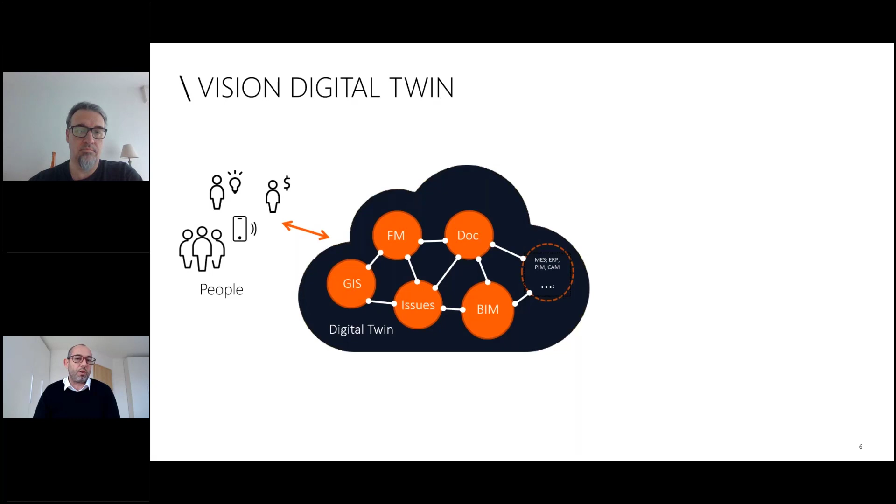You already jumped a bit ahead. So in the end, our vision is that we create a digital twin. This is all of the information we have, put in the cloud: BIM models, issues, geo-information systems, maintenance information, documents, and more. This information is in nodes in the cloud, and it's connectable. These white connection lines are for me the most important part: we don't store information only on our desktop computers, but somewhere we can use it together. This helps people make better informed decisions, act more competently, make fewer errors, and be faster.

But it's not only the people, it's also the buildings that get smart and benefit from centralized data management in the cloud, and more and more autonomous systems, like for maintenance, cleaning, or construction, or even machines that use infrastructure, like trains and cars. Next, please. Good. If we now connect this information, we will get a huge data lake that we can empower even more by using computer science and artificial intelligence.

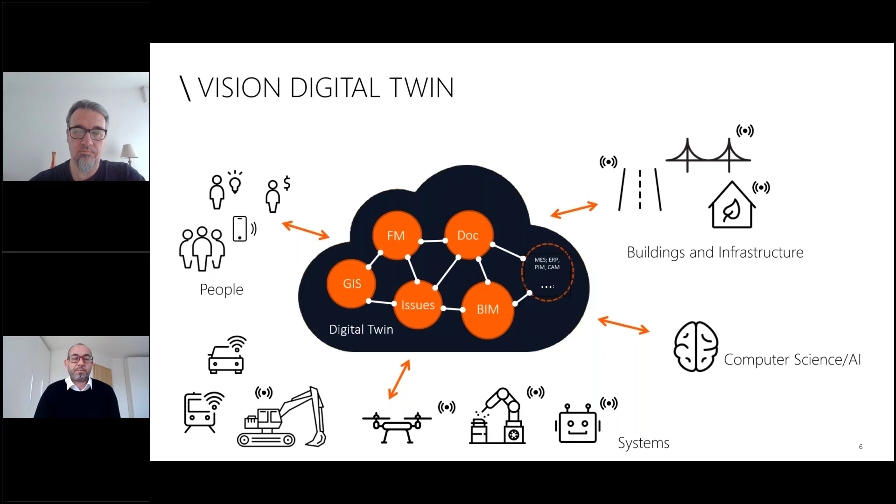So this is a slide about the status quo. Where are we with this digital twin technology? Where are we with building information modeling? You see, it's getting ever more mature.

So today we have well-defined model types for different purposes, like for design, for machine control, or models for simulation that give us an outlook and forecast of performative behavior of, for example, the MEP system. So it gives us a view to the future.

We can define with our building information models the entire built environment. So besides the buildings that you possibly know that is there, this main topic of BIM, we can define as well landscape, transportation infrastructure, and all of the infrastructure for supply and disposal. So altogether, there's at least I don't know any gap left that we cannot describe as a model.

If you look at the building life cycle, we see that in the AEC industry, the usage of this model is not as comprehensive, maybe, as the asset classes we can describe. So there's more and more digital tools in place in early design processes. Of course, in the design phase where BIM maybe comes from, we see less usage at the moment on construction sites. There's different reasons why it's like this, but these construction models are really complex and effort to produce them. But we see models that go to construction sites are already in use.

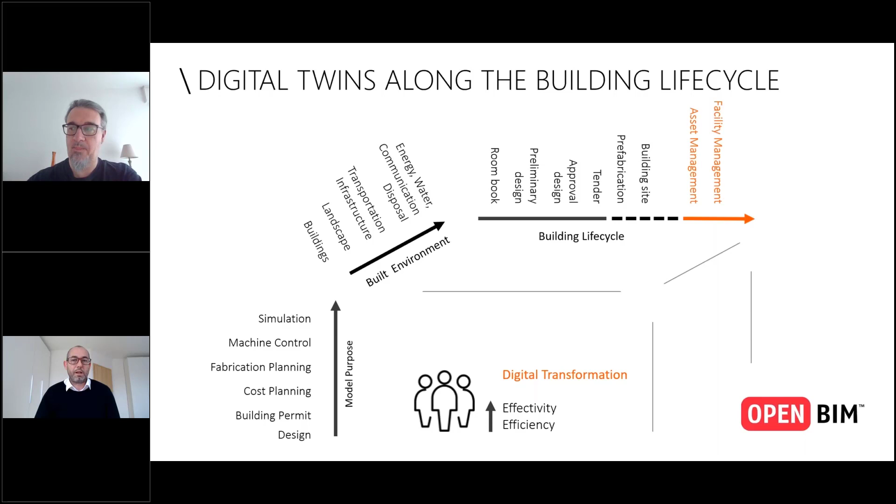So what is the challenge now for BIM to FM handover? To understand this, I think it's important to understand what this model really does. The BIM model, you can see here one on the slide, always consists of geometry. So this is what I meant with showing the spatial context, so we can easily understand this geometry.

But a more important part is the information part we can connect to this. So the geometry is not only geometry; it has a meaning, a semantic. For example, here it's a heating system, part of a heating system, or it's a pipe, and you can manage the properties of this pipe from design to construction to handover now on this geometric model.

So this is the information part, and I would say almost as important is the option to link information to it. So not all of the information about a certain element is stored in the model itself. We have the opportunity to link information on external cloud services, or we can link documents or specifications to this. And of course, all of this information should not get lost if we hand it over to facility management.

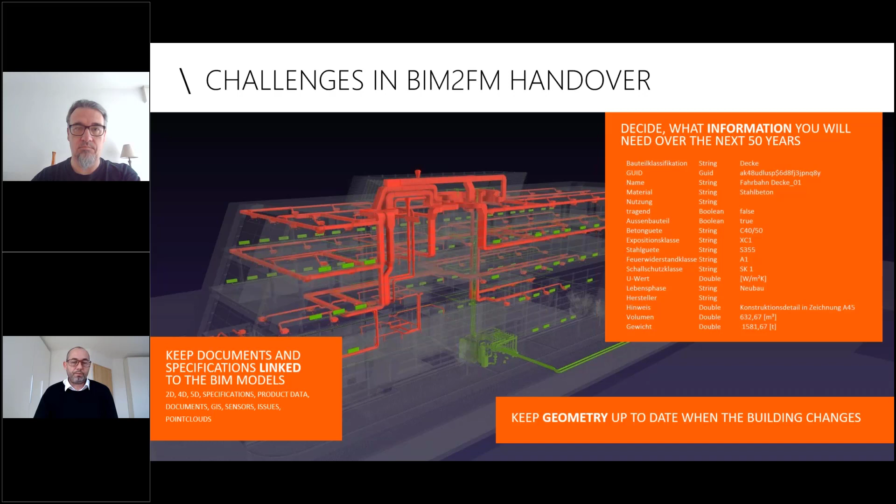We created on the ALLPLAN side a solution called BIM+. The most important idea behind it is that we don't store this digital model as a file. We take that file and create a real database from this.

This database includes all of the information of the model and can be maintained by us at ALLPLAN, or by any other tool out there that is openBIM ready. Our Spacewell solution, MCS, is also connected to the same database and maintains the same model over time. So we don't really split the design and maintenance models.

We make the facility management system maintain the BIM model. This way we achieve a data-secure and data-enriching process over the whole life cycle of the building.

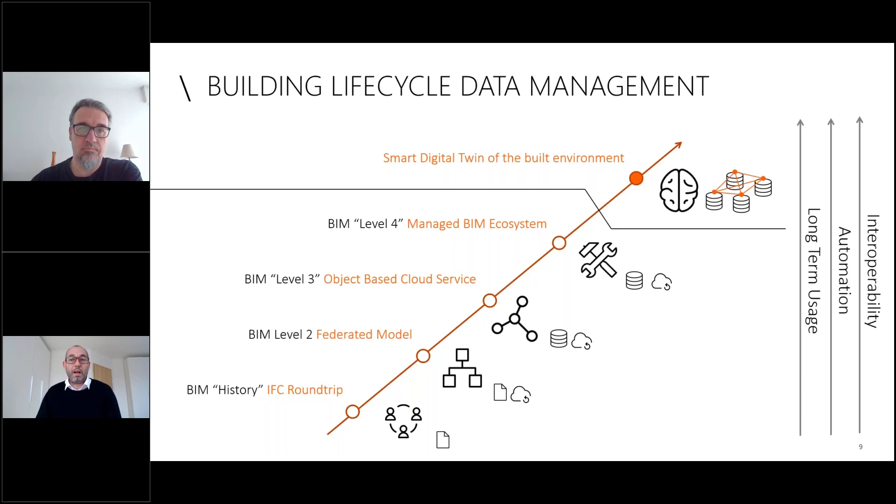So this was a lot of information already. If you have any more questions about BIM, you can always contact me, and we would love to give a deeper dive into our solutions. But today I would like to hand over the microphone to Kurt, who will show you in practice how this integration looks like.

Thank you, Stefan, and thanks everybody for spending some time here with me this afternoon. In the next half hour, I will guide you through how we have done an integration between our MCS IWMS software and ALLPLAN's BIM+ environment.

But before I jump into that, I'll give an overview of what Spacewell's activities are, what we're doing, how we fit in the Nemetschek group, and then also a few things on the MCS software suite. I'll try to keep this chapter as short and concise as possible.

Just to give you an idea, we've been around for quite some time. We are headquartered in Belgium, but we have branch offices in various places in the world, as you can see here. The software has been around for quite some time, and we have more than 2 million users worldwide. It's also a cloud offering that we have.

Spacewell is actually active in the operate and manage division within the Nemetschek group. You could say that we come last in the BIM process, because first there's the planning and design phase, where typically Graphisoft, Vectorworks, but also ALLPLAN is active, creating and sharing these BIM models, then carrying them over to building and construction. Today we're going to talk about how, once we have those BIM models available after construction, we can actually utilize them during building operations.

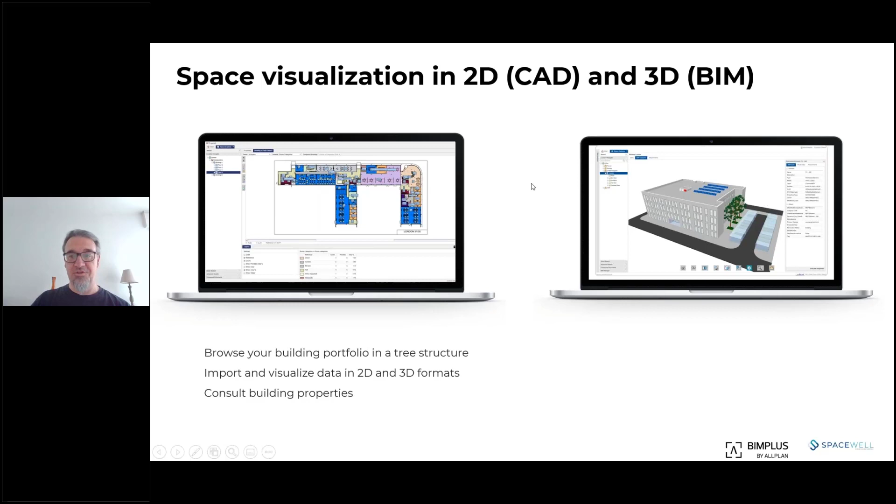Today we are going to talk about the model integration in the application. But as I mentioned, we also have a 2D solution in place, and one does not exclude the other. So for the same building, we can make these combinations.

Basically, you create objects in MCS, and in this case here we can see what we call maintenance objects. That's just equipment. And on these equipments, we can then define maintenance plans that require regular inspections or maintenance on certain weeks of a calendar. And these then, for example, lead to work orders that can be dispatched to technicians.

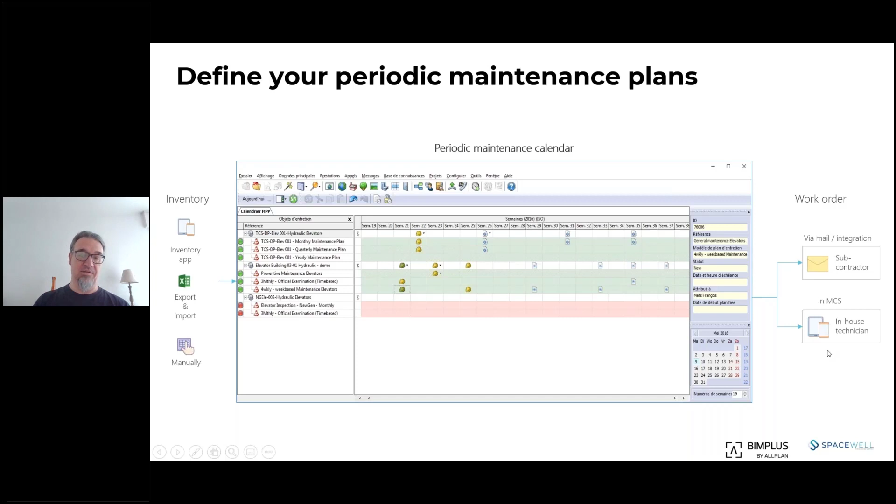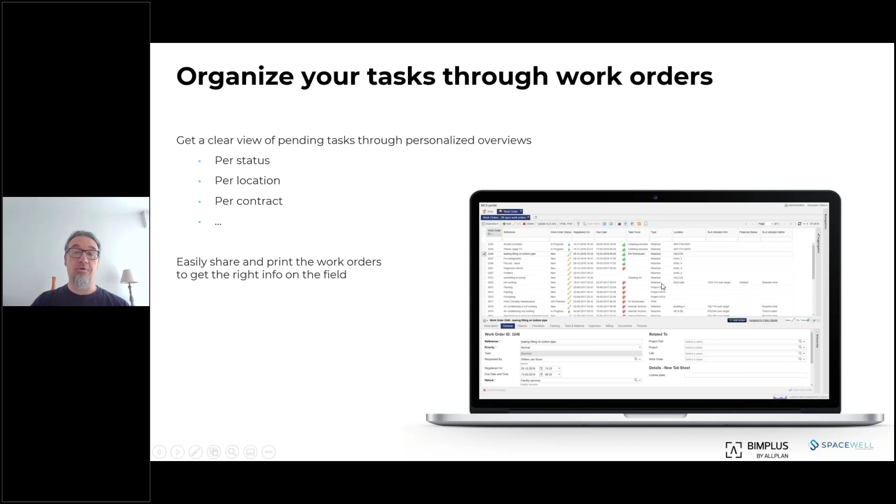And people have various user interfaces to interact with these work orders. So first of all, we have a full web-based portal solution where you see all the work orders that can be allocated to you and then do some handling here. Most people in the field are using our mobile work manager application where they can see details of the work order, where they have to go, sign off, and all that.

So it's in this process of creating and handling work that we're going to see what benefit a BIM model can bring to these people.

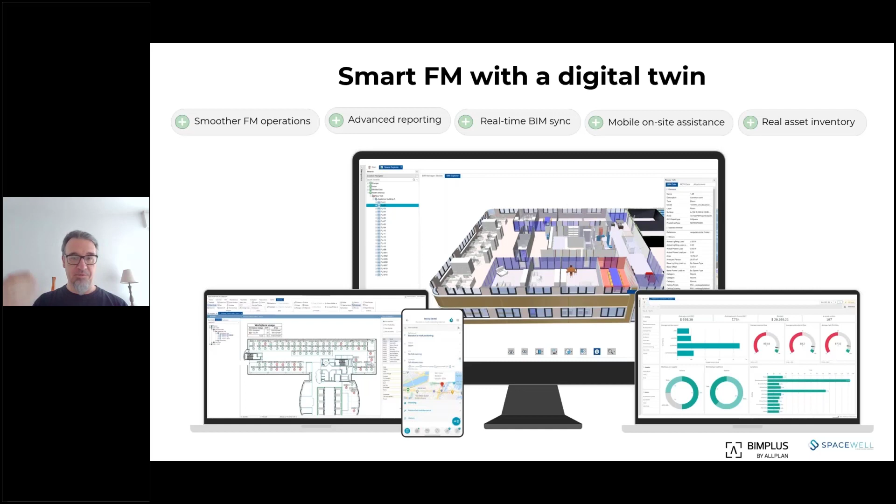So now let's jump into the real topic for today, which is the integration between BIM+ and MCS. So basically, the story is, as a building owner, facilities manager, how can you actually use those BIM models that are available for your portfolio for the processes of building maintenance, cleaning, space management, moves and changes, etc.

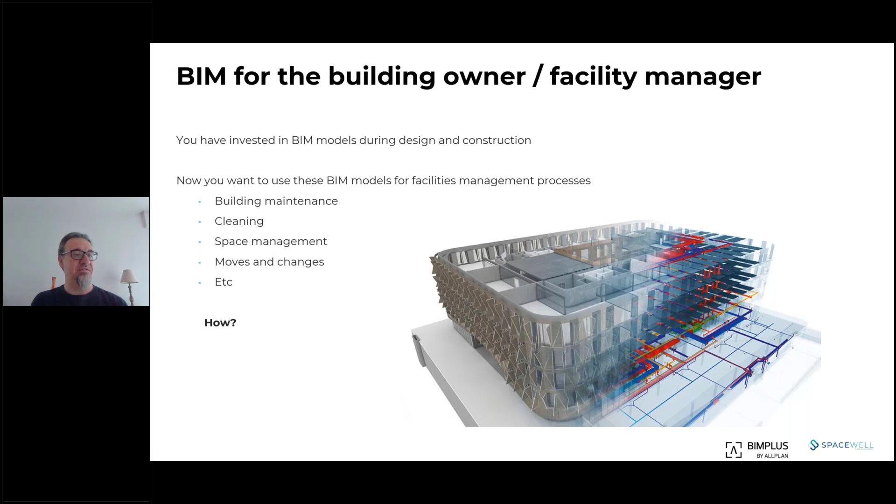So how do you do that, and what is best practice? Today we're going to focus on building maintenance process. For that purpose, the model that we present is as follows: for us, the asset information model plays a central role as part of the master data.

So asset information model is actually the model that contains, let's call it, the as-built of your assets, your current as-is situation. And nowadays, very often that information is saved as BIM models, as part of documentation. So they play a very central role in our solution.

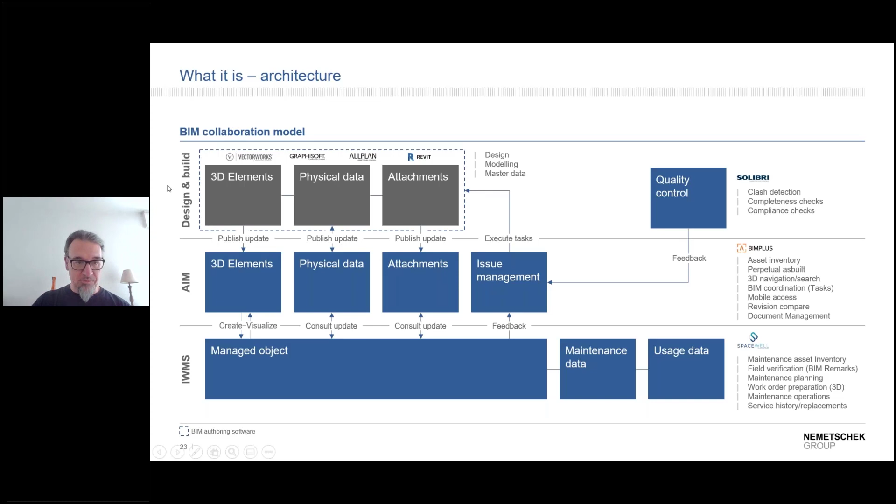I think if you want to remember one slide of this presentation, this is probably the main thing. So what this architecture actually means, I hope to make that clear during the presentation. It means that the solution of BIMPlus and MCS together is a cloud-based platform that you can access through your web browser, and it works with various IFC formats. It can take BIM information from various authoring tools.

What can we do with that? We can import BIM models, we can export them again, we can update again. This important part is revision control, because a BIM model, even during operations, is not static. Buildings undergo change constantly. Not always big renovations, but there are always changes in one or two rooms or a corner or a wing somewhere. And we have to keep our facilities management database in sync with that.

It obviously supports multiple models, but that is more the benefit of BIMPlus, and we utilize that. What can we do with it? Well, we can view and explore the BIM models from the MCS software. We can consult and search all the property sets, so we don't have to make a choice. Which properties do we want to import in the MCS software? And the answer is simple. We do not duplicate information. We just make all the information available. So there's only one place where the property sets are stored. We can compare revisions, and it's of course integrated with software.

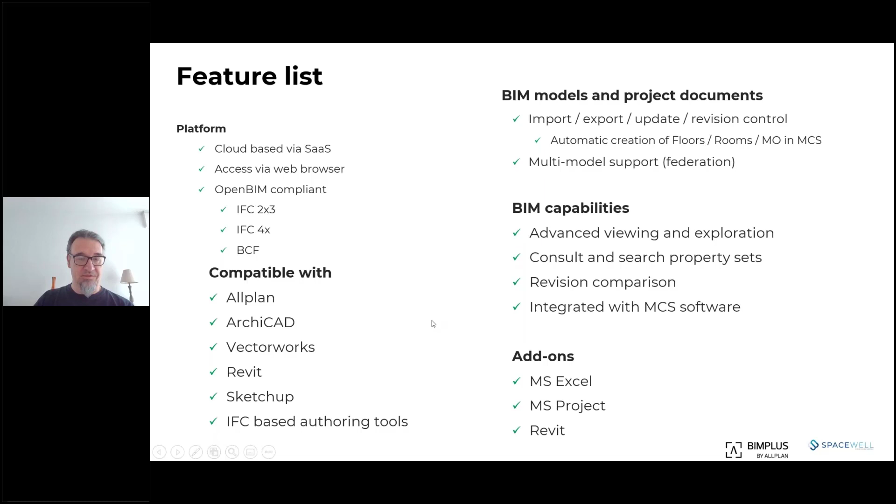Okay, enough theory. I think that you're all eager to see how that works. And just to give you an idea, I have a couple of demos here. Maybe before we do, just quickly jump to BIMPlus for those who may not have seen it. So BIMPlus is the ALLPLAN product, and in BIMPlus, you can create so-called projects. A project is typically a building or a site for which you want to maintain and share BIM models.

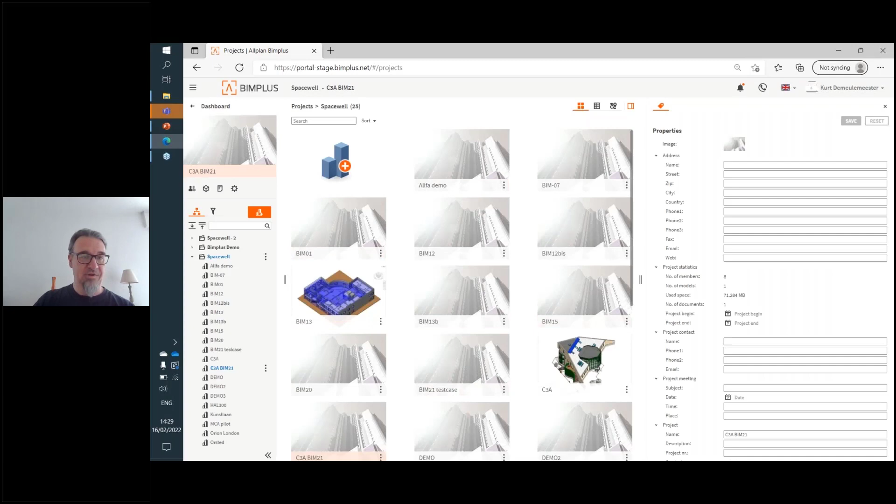So in this environment here, I can have a lot of projects. The project that we are looking at here right now has one BIM model and an attached document. It's a simple demo, but let's just quickly take a look, because this is the model that we're going to use throughout the rest of the presentation. So this is the user interface of BIMPlus. I have my model here broken down in a couple of disciplines, and there's also a topology here of different floors that I can visualize.

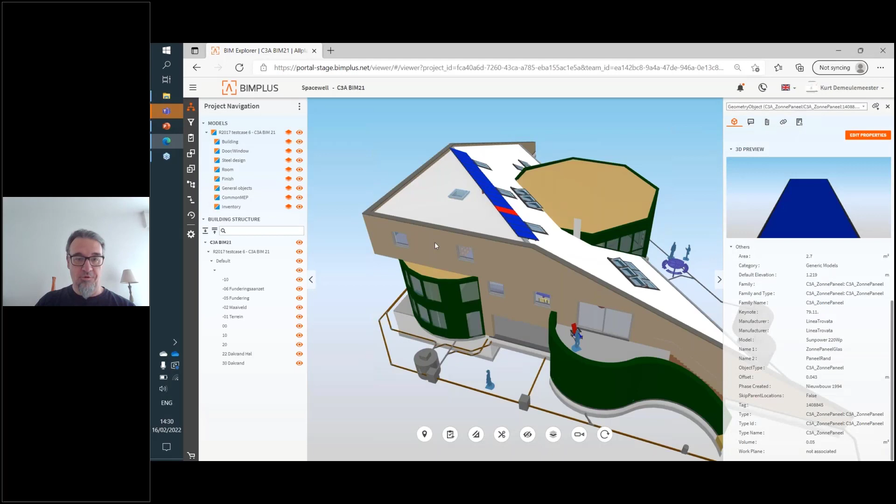So I can easily navigate through that. I can click on items like these solar panels, for example, and then I can consult the property set of these solar panels, or of this wall, or this window here in the roof, as you can see. So it's a convenient user interface to do all sorts of exploration, querying, searching, verification, measuring distances and angles, etc.

A full demo of BIM+ is not a topic for today. So for those people who would not be familiar with that, please get in touch with ALLPLAN, or there are plenty of videos on BIM+ available also on YouTube.

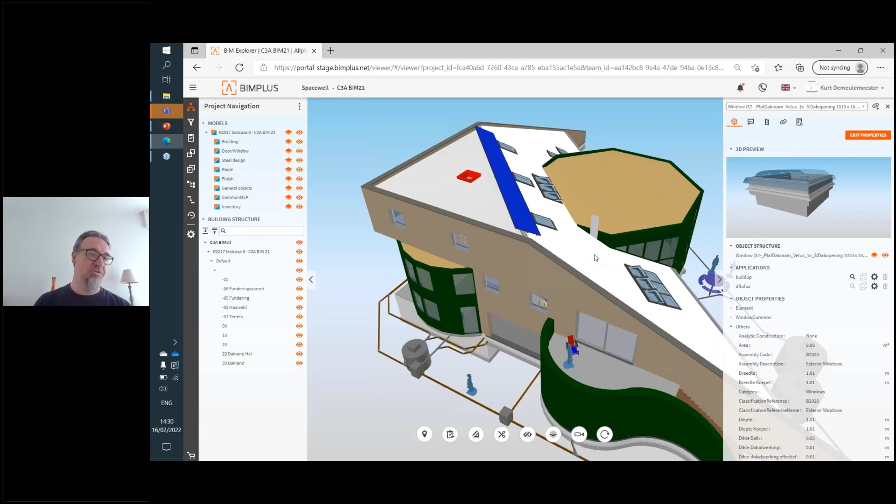But this model here is now going to be used in MCS. So the prerequisite is of course that you have BIM models and that you publish them as a project on the BIM+ server. So now let's take a look at how we can utilize that in MCS.

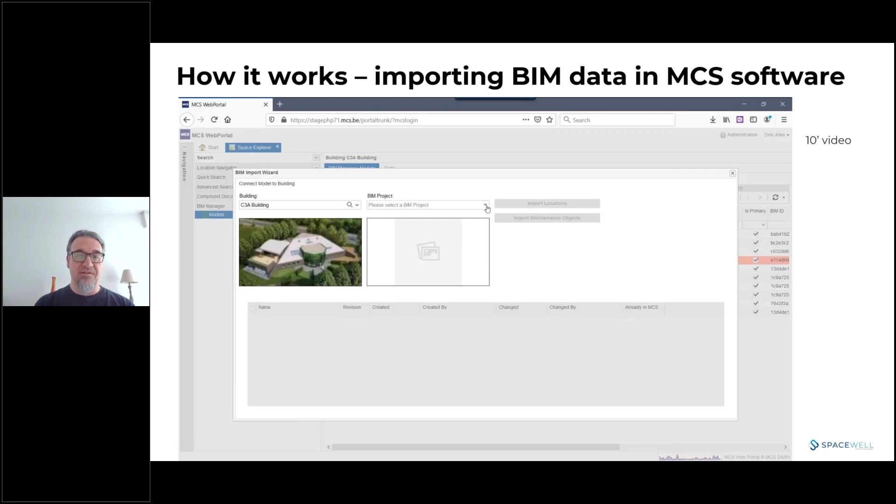Here I have a list of all the BIM models already in my database, and we're now going to add one. So I select the building that I want to have. And then in BIM project, this is a list from BIM+, all the projects to which I have access, and you can see there is one BIM model in this project which is not in MCS yet. The first step is we're going to import locations.

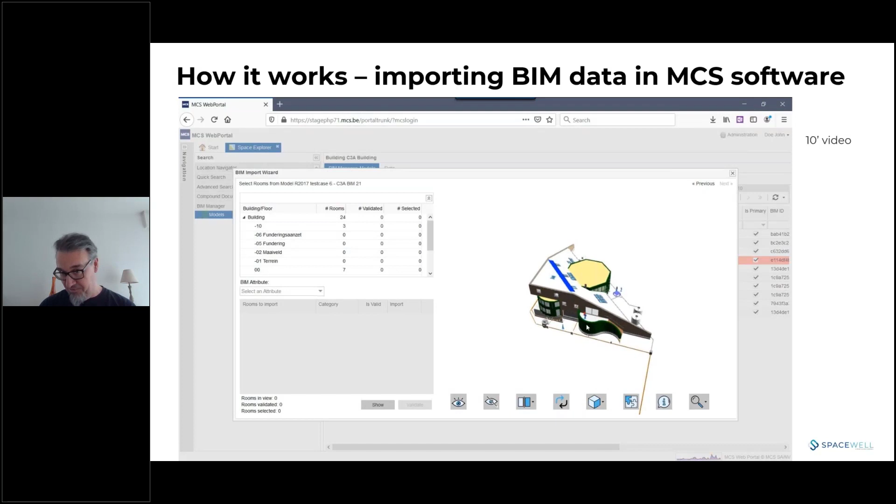So this BIM import wizard gives me a view of what is in BIM+, and we have integrated this viewer for BIM+ as well. And I can consult all the property sets without leaving the MCS user interface. And this is exactly the same procedure as what I just demonstrated through the BIM+ user interface, but it's completely integrated in MCS.

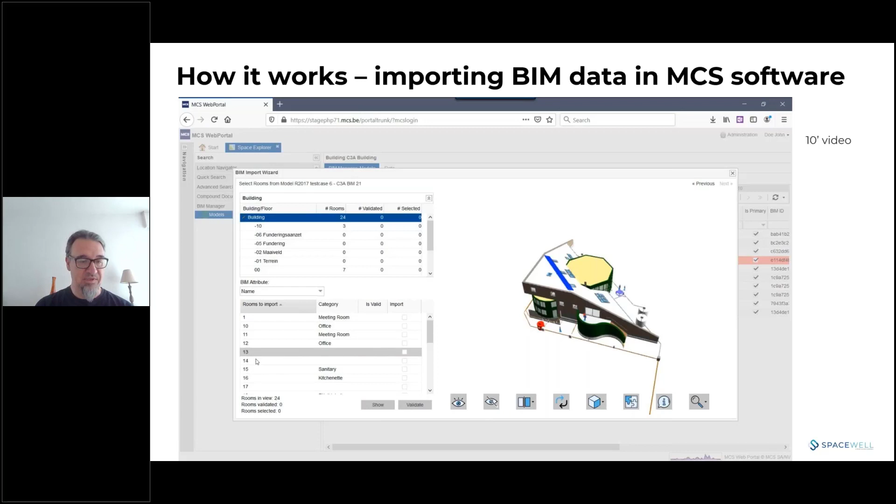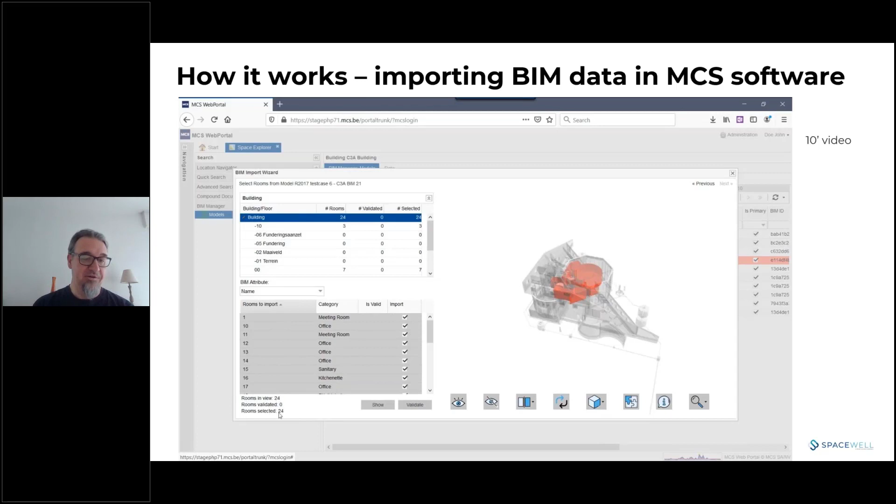So here we now see that on the building level, we have 24 rooms that we want to import. And the BIM attribute name maps to the categories of rooms in MCS. We need to tell what category of room something is before we can import. But the designer forgets to fill in that property for some of the rooms. So I can do this now here as a preparation step, saying all these are offices. So the better the designer has done that mapping homework, the less work I have, but I can still do the mapping here at runtime.

And now we validate if all these rooms are okay for import. So if I have green checkboxes, everything is fine. See, I have now prepared a list of rooms and, of course, the floors to which they belong. And what is now happening is this list that I've prepared is now being imported in MCS. So as you can see here, for each item that I've selected in the BIM model, it has created a new room and a new floor in my facilities database with a unique ID.

And we also store the unique link to BIM+ for each of these elements, so that later I can also see what all the property sets in the BIM model are of that room. We'll come to that in a minute. So that's a way of showing how we actually do import.

And for maintenance objects, so that's for the equipment and the building elements, we can do the same. So here, again, it's the same procedure. You select a BIM attribute that contains the categories in MCS. And we then fetch what is in BIM+ currently. So that's a lot of information in various disciplines.

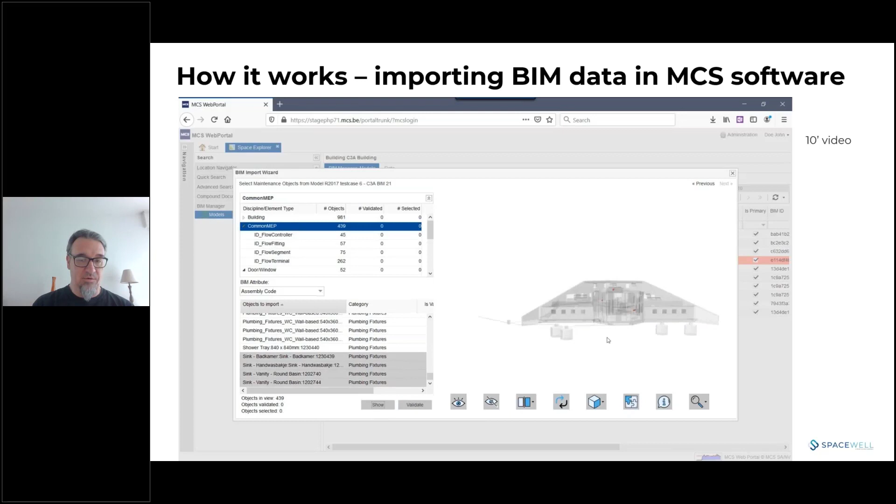For this purpose, we're not going to import any walls or rooms. We're just going to do some of the MEP equipment where the designer has mapped a lot of things to sanitary and rainwater, as you can see. Some other things have not been mapped yet. Of course, if you want to import almost 1,000 objects or sometimes 10,000 objects, this is a bit time consuming. So here, for the sake of the demo, we'll only do a part. So you see, everything here that you want to import can also be visualized, just to make sure that you know what you are importing.

Let's go up. And if we sort on category, then we can multi-select everything that has been mapped, like this, and validate. So we will mark that we want to import it, and we validate if that's possible. Now, these two at the top, you cannot import because they are on a floor that is not in the database yet. So here for the demo, I will skip it, and I can do that afterwards. You can import in various chunks multiple times if you want.

Doors and windows were also mapped, so we're also going to use those because we require maintenance on them. Now, again, there is one door, it's a window in the roof, but that roof has not been created in MCS yet. So there's a dependency. And let's take a look. Finishes, we're not going to do that.

Inventory, we'll just do a subset of all the furniture that is there. So here I have some Breuer chairs. These were not mapped, so I can do the mapping to the appropriate category here. These are tables, right? Let's go down. There's more chairs there. We'll just do a few chairs and a few desks, and that'll be it. But you understand the procedure. So the better the mapping has been done beforehand, the less mapping I have to do here at runtime, but I can still do that.

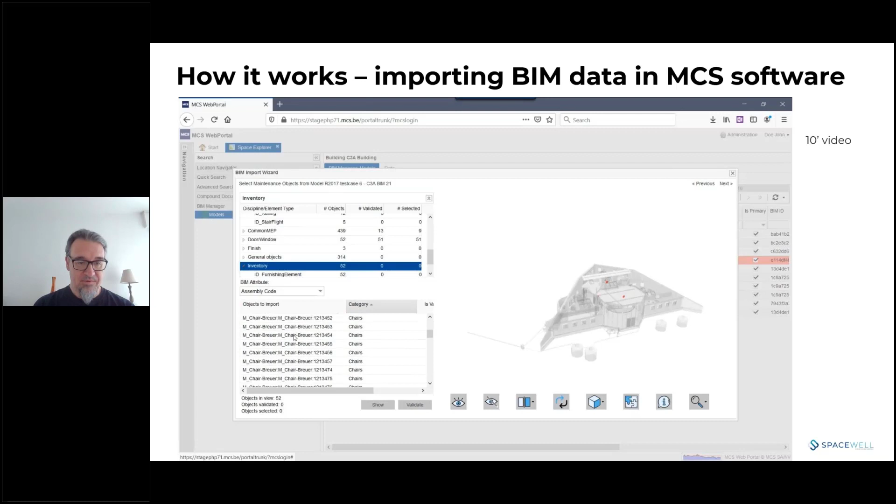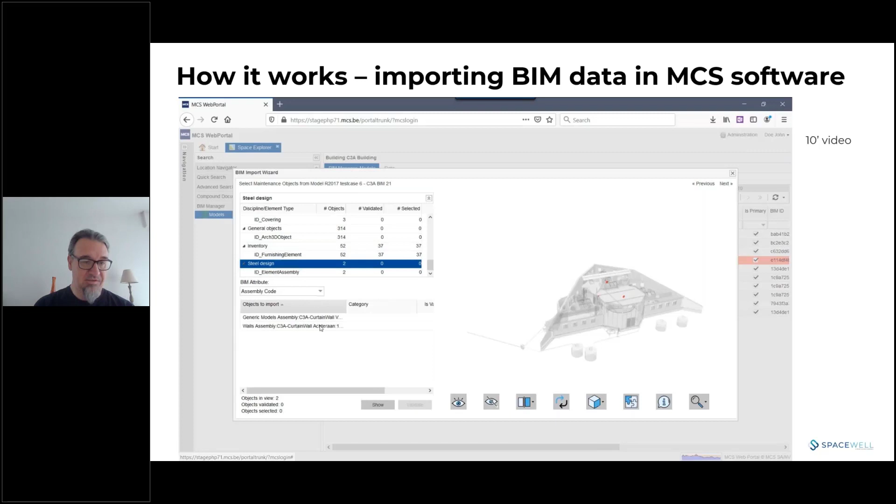And this is also a table, and some more chairs. Okay, so what we have selected so far. Let's do that. We mark for import and we validate. Okay, it's all green. And you can see in the bottom now how many objects I have validated. Steel design, we're not going to do that. So let's press next. Everything that I've prepared is now in this list, verified and validated. So I can now start importing this list. 97 objects at the moment.

This is just a sequential process that takes a few minutes. Meanwhile, let me explain what is happening. We are creating those objects in the MCS database with a minimum set of information. It's just the identification and the category, the name and the type. But all the property sets of these doors and windows stay in BIM+. We don't have to duplicate all that information, because we will make that information accessible from the MCS user interface. And I will show you in a minute how that works.

So you see, I can do this for rooms and floors and for all the equipment. I'm now doing this with one model for the demo, but in reality, for larger buildings, you have multiple models for one building: the architectural model, an electrical model, an HVAC model, a structural model, etc. This is all supported. We support multiple models for the same file that hold various aspects of the building. The requirement is that you upload all these models to the project in BIM+, and then through the same BIM import wizard, you can populate the MCS database with all that BIM information.

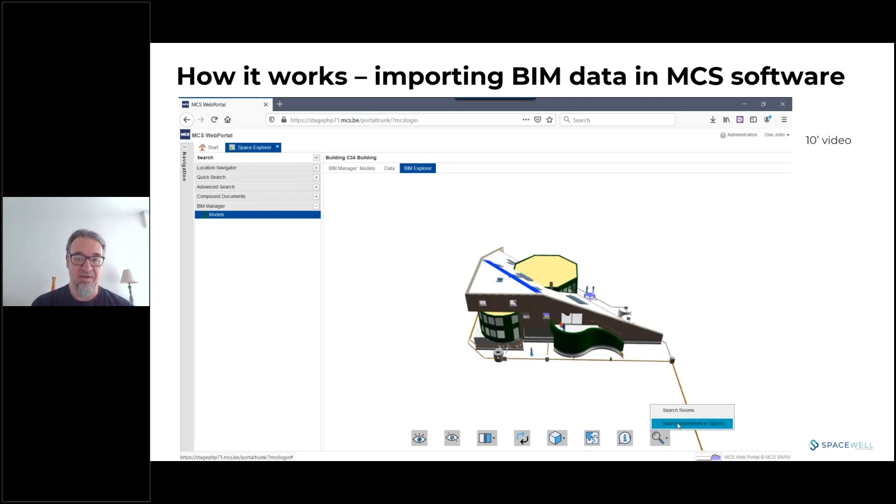Okay, and I can continue in loops here doing this multiple times. Once I've done it, there is another BIM model row in my database, with when it was imported and by whom. And now I can show it without leaving the MCS software in BIM Explorer. This opens all the geometry, which is in BIMPlus. This is not in MCS, but we are using MCS as our user interface. And here we can now search for some of the maintenance objects that we have just imported.

So if we take, okay, I can select here one or multiple. So all these chairs, highlight, where are they? So they're shown there in red. So that's just an example of the result. After an import, you actually get this. You get a BIM Explorer window on your building that gives you access to all the BIM data that are in BIMPlus and that are connected to this building.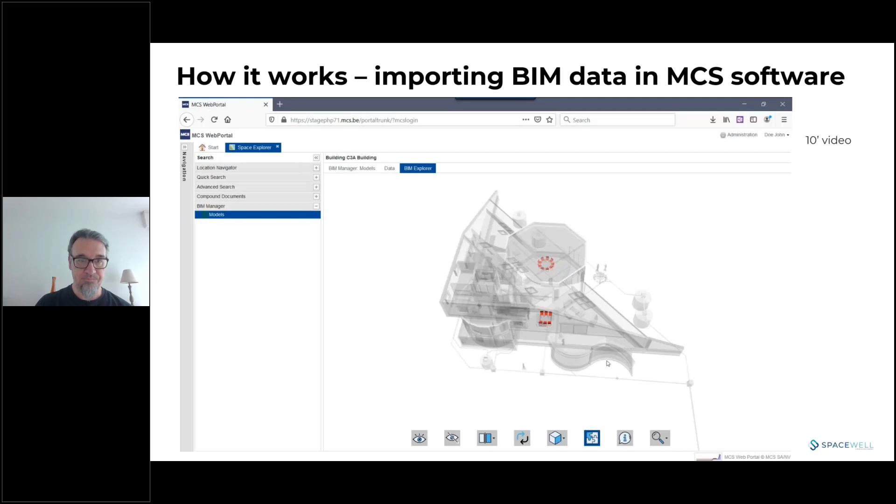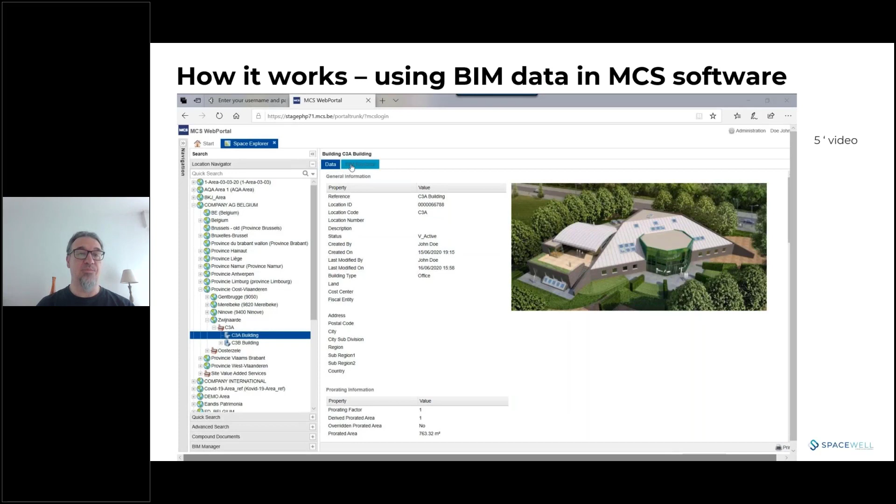Now, how can you then use that? Because importing, yeah, that is something that a specialist is doing from time to time. But more important is, how do you use it in daily life? And there are a lot of people who are using it like this. So again, it's the same building, and we're launching the BIM Explorer. So let's have a look at what we can do with it.

BIM model opens, and just by using my mouse, I can of course navigate. I can control the camera to look at the building from the front, the top, the side, or a perspective view. That is very obvious, and that's nothing complicated. And you just rotate and you zoom by scrolling with your wheel mouse. You really don't need training for that.

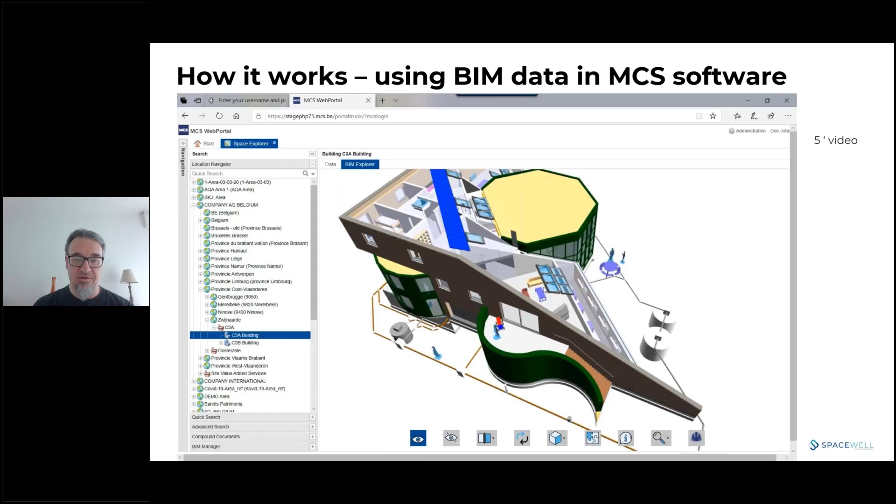There's an option to hide. So if I hide the slabs here of the roof, then I get access to the interior of the building. And let's stop the hide mode. We can even slice the model. Let's have a look like this. So this is a room.

Click. And I have a BIM data tab. And this is at runtime fetching the property sets that are stored in BIMPlus, and we display that here. But it's also an MCS room, which is linked. So that's a room that I have just imported. So you see we have a tab with MCS data and with BIM data.

So this solar panel here has not been imported as an object. So these neither. So I only have a BIM data tab, but I can still access all the property sets of everything through my MCS user interface. And that's the beauty of this integration, even for objects that are not in MCS.

So here I'm now slicing that building horizontally with a horizontal plane, which makes it then easy, for example, to just look at the ground floor. And there we have the furniture, and we have imported that furniture, remember? So I again have MCS data. Yeah, and the same here for various things. Yeah, let's close that.

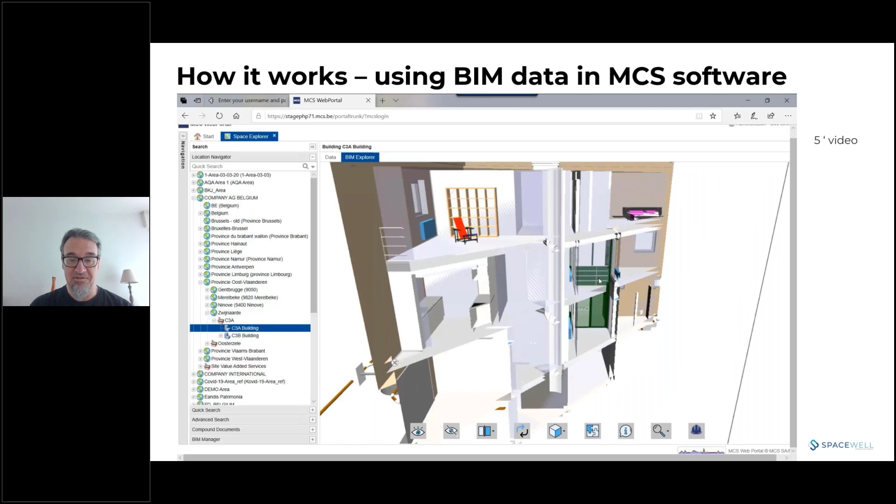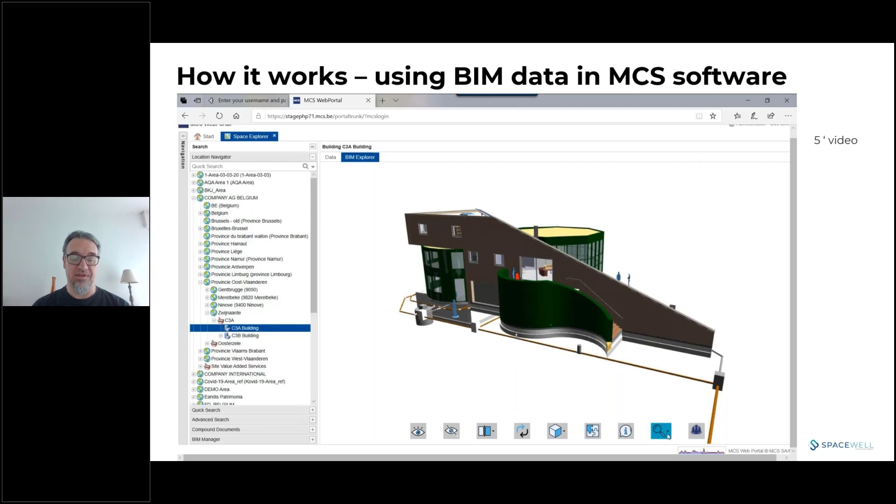And we can even slice our building also through a vertical plane, whatever, and then that makes it easy to look at the inside on multiple floors. Yeah, stuff like that. That's navigation and exploration. So you can navigate, you can hide objects, you can click, you can slice. And now I'm showing what you already saw briefly, that we can search in this BIM model.

And I get a list of all the equipment here. Again, select one or multiple, or like this, all these chairs, where are they? And they're appearing here. And now we can do something particular. Imagine, let's just unselect everything, that there is an issue somewhere with a bathroom sink. So I can just search for sink, and that gives me all the sinks in the model. So this bathroom sink here, highlight, where is it?

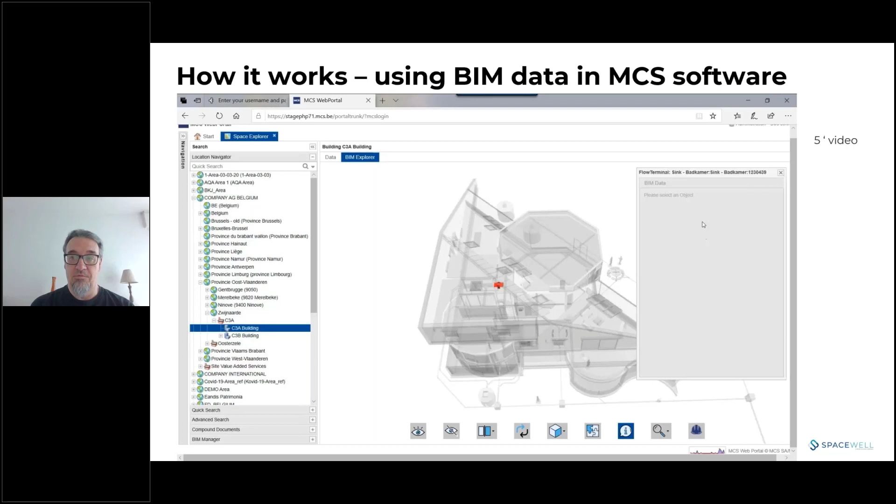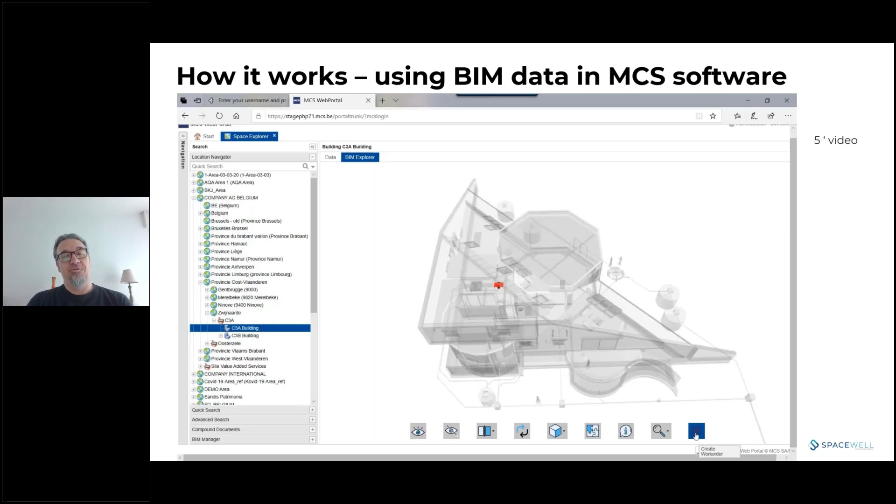Yeah, there. So it's an MCS object, and it has a BIM dataset that is in BIMPlus. I can now create a work order for this item. So in MCS, you can create work order templates. These are just sheets to fill in. So I'm picking one here.

This is just an example, technical issue, and now I have to fill in this request, and some of the fields have already been pre-populated for me because I'm using a certain template. So priority has already been specified, but I can specify severity, for example, and I don't have to tell where it is and what object it is because I have selected that in the BIM model. So the only thing that I have to tell the system is what is the problem.

Okay, and then I'm saving my work order. So that's just the use case of, yeah, you can search items in a building, you can select them, and you can create a work order for it, with a number.

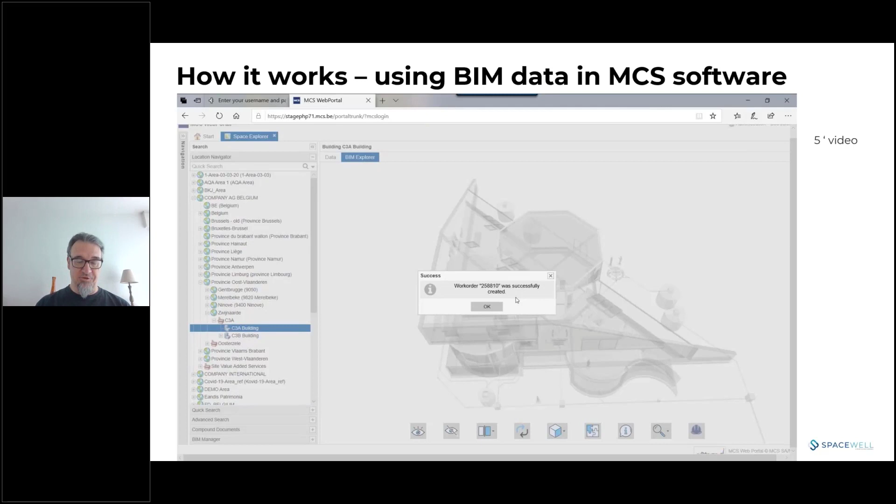Okay, now that is of course the story of the person who reports something. But now let's take a look at how the service technician is seeing that. Now these service technicians are not going through the Space Explorer. They know that they have to work on all the work orders that have been assigned to them.

So they will navigate to the work order module, and they will see lists of work orders that have been published for them. So this is now work orders this month, everything, and obviously the one that I've just created is on top of the list here, depends on the sorting. And here I have a description of that work order. Problem is that the sink is clogged.

Yeah, but where is that sink? Imagine that the technician is not familiar with the building. Okay, it's in that location. And I have objects here. Is that kitchen sink? Yeah. And then I have two buttons here, details and BIM Explorer.

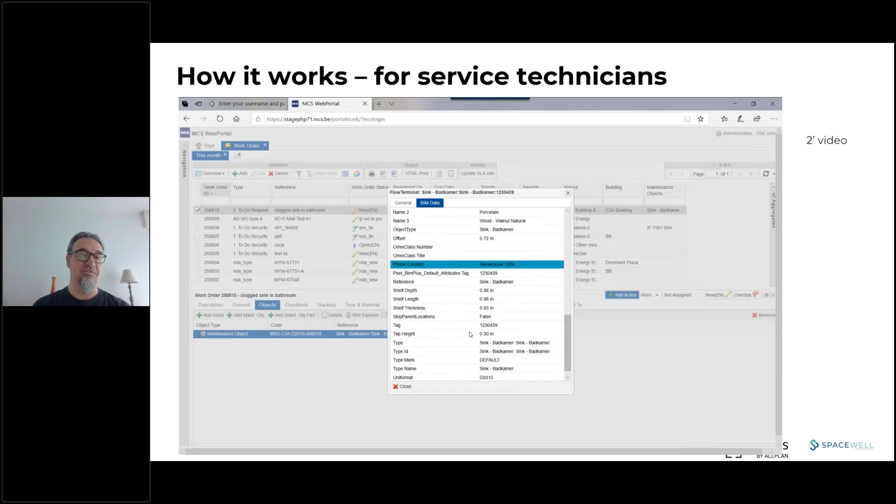If I click details, I see details of that kitchen sink, which is an MCS object, but also BIM data, click, and this fetches the BIMPlus data. Again, even without opening the graphical user interface, I have access to all the property sets in my BIM model, which can be very handy for that person. If there's a spare part number or something, I can look it up here.

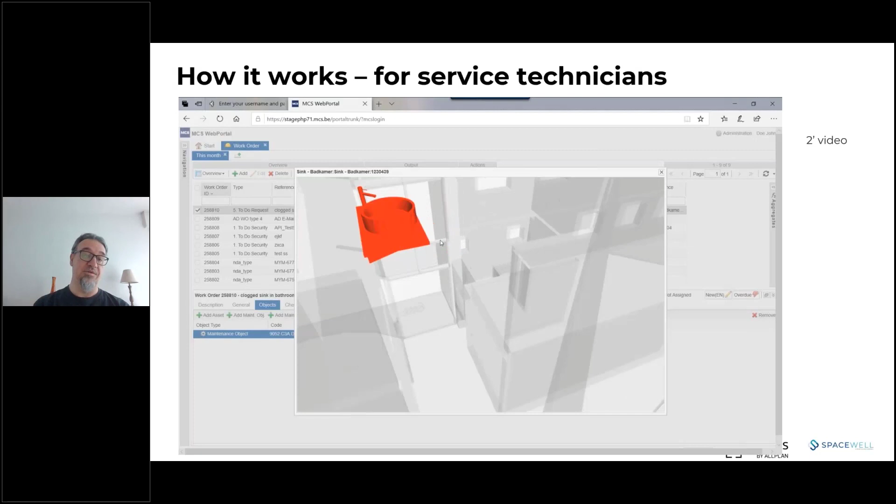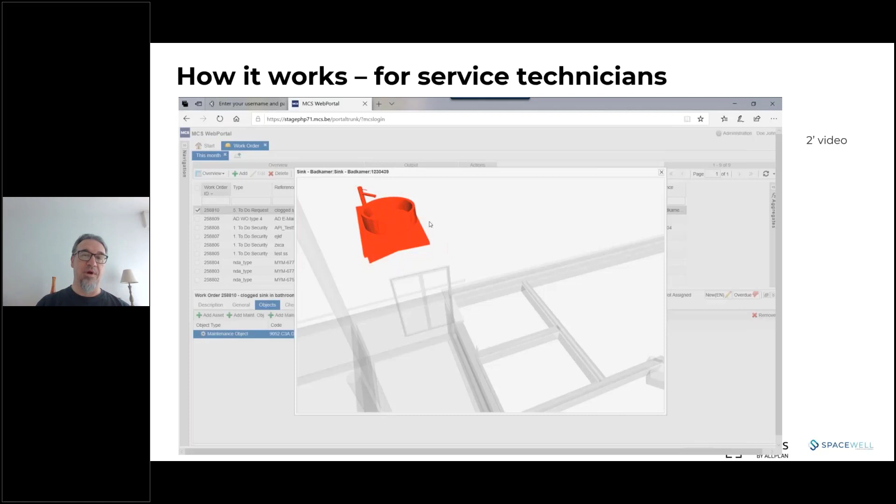But of course, you can also highlight where that kitchen sink is located in the building. And again, here, illustrating. Okay, so that's just an example of how a 3D model permanently connected to your facilities system can actually help you in your facilities processes. And in this case, it's just a simple repair of a defective piece of equipment, that might need replacement or repair or whatever. So that is actually in a nutshell how we utilize BIM to our advantage in daily operations.

I'm just keeping an eye on the clock. We have 10 minutes left, and that gives me just enough time for the last part of the demo. This is all nice and well, but our buildings change. And how do we handle that?

The typical scenario in buildings during operation is that we have a lot of small changes, but quite frequent. It depends a bit on the industry. In more technical buildings like hospitals and factories, you have more changes than in office environments or in school buildings. But anyway, everybody is confronted with change from time to time. So how do we deal with that in our solution?

Well, we were very happy with the revision mechanism that exists in BIMPlus. Because in BIMPlus, if there is a change to the geometry, then the designer in ALLPLAN or in Vectorworks or in Revit, whatever, they can make adjustments and then republish that in BIMPlus not as a new model, but as a new revision of an existing model.

And what BIMPlus is doing with that is, again, background processing in the database. It's part of their engine. They actually create revision comparison lists between two revisions. And that is super handy. You can basically see that here in the screenshot.

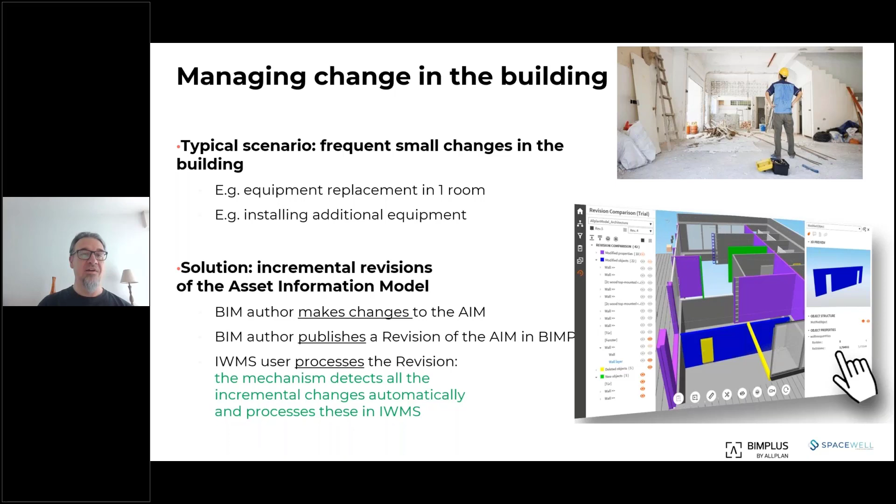Purple is modified things. Blue is also modified things. Green is new objects, so there's a new wall here, there's another new wall here, and deleted objects here, this door is no longer there, and that beam is no longer there. That's super. So that's exactly what we needed for the MCS software.

So in case that there is a new revision in BIMPlus, we can check that because we can check for revisions. We can see here which revision, like here, this revision in MCS is number 2, but there is a revision number 3 in BIMPlus. So that's more recent information in BIMPlus than in MCS. So what can we do? Update our BIM model.

So I'm selecting the BIM model and I'm launching the update wizard. Okay. So this wizard now connects to BIMPlus. First, you can see that loading from BIM server to fetch all the latest information. Yep. And I can see now that there are 3 revisions in BIMPlus.

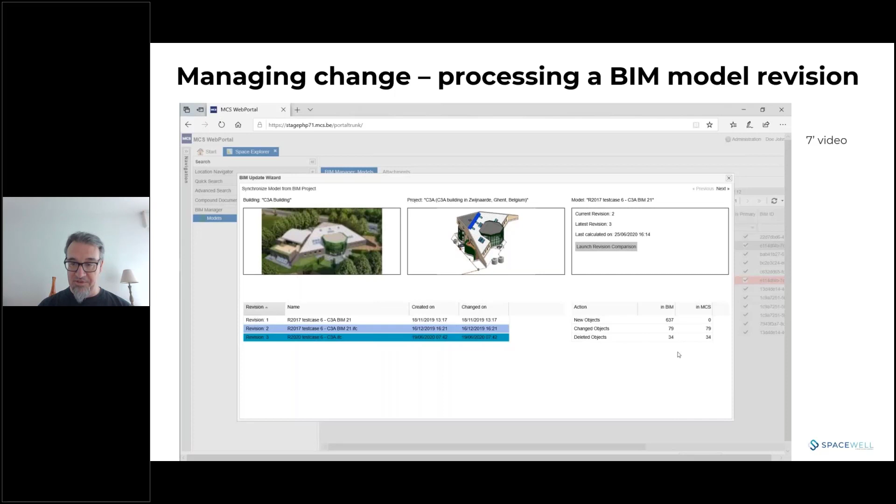Here, yeah, in that model there are now 637 that are not in MCS. I have changed and deleted objects. So the wizard will help me process all these. This is a 6-step wizard.

The first 2 steps are about new floors and rooms and new equipment. But I'm lucky, there are no new floors, so go to the next. There are a lot of new maintenance objects that I have not processed in the previous step. This is actually the same procedure as what you just saw when we link a new model. I'll just do a small part of it to show you the principle.

So I have new doors here, I can show them in the BIM model. Just to keep it simple, they were not mapped, and I did not look at BIM attributes, but I'll just say that these are all interior doors. And validate them and then mark them for import. That's business as usual.

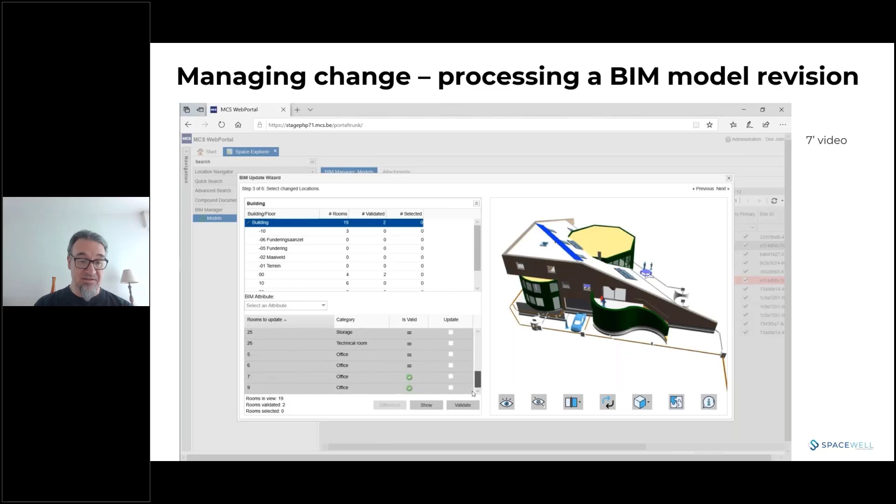And then I have changed locations, so 19 rooms have been changed. There can be all kinds of changes - rooms could be smaller, bigger, but could also have changed property sets. In that case I have an equal sign because it's not relevant for MCS, since we're not duplicating those properties. But here, for room number 7, I can still see the difference.

Apparently the description has been changed, and that is something we use in MCS. For the other room, again the description has been changed. Okay, simple. So again, I mark now - not for import, but for update. And then with maintenance objects, we have the same.

We have 19 doors and windows where things have changed. We validate to see if we have relevant changes. It's easy - MEP equipment, all my plumbing fixtures. Let's validate - well, there are a few here. If we look at the difference, in revision 2 they were in another room than in revision 3, as you can see.

Okay, so I need to process that. And the same here, it's in another room - somebody has moved equipment. So we're going to update. Then for furniture and all the inventory equipment, it's the same, it's all valid. Again, you might see that from that room to room 27, people have moved furniture around in the new version of the BIM model. Fine.

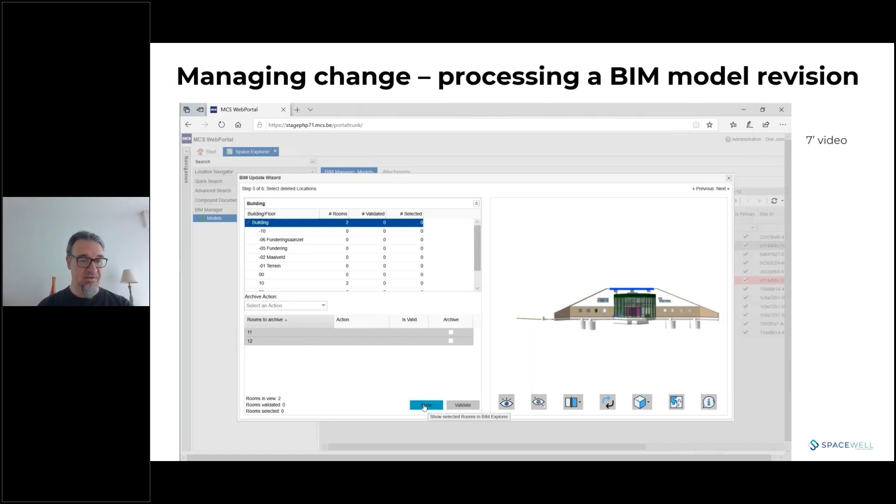Okay, so it's a matter of cross-checking, mapping, validating, and then marking for update. The last two parts of the wizard are what do we do with stuff that is deleted? In this case, these two rooms, 11 and 12, are no longer there in the BIM model. But I'm not going to delete those rooms in MCS because they have a history - so there we utilize archiving, my action will be archive.

In this case, my validation is not okay, because I don't have the rights to do an archive action in my MCS database. So I cannot do that - we're also checking rights. But okay, let's skip that.

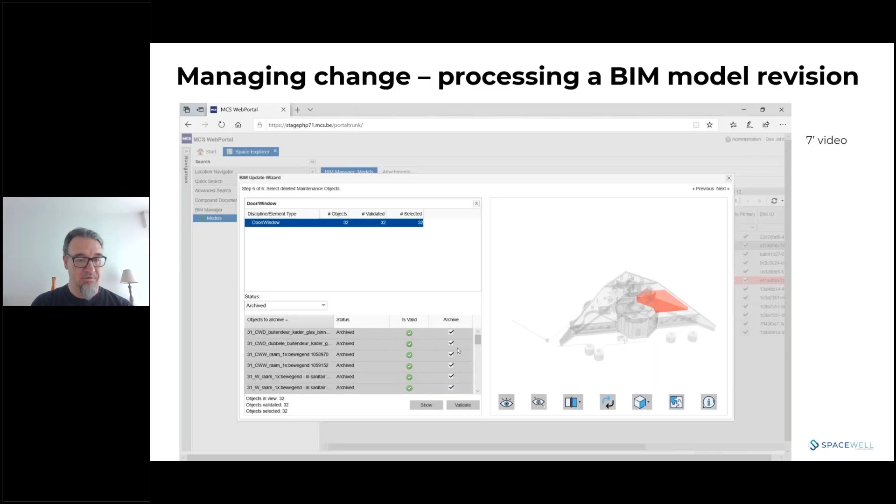For maintenance objects, it's the same. There could be work orders attached to maintenance objects, there can be maintenance plans. So we're not going to delete them, although they are not there physically in the building - we're going to archive them in our facilities management system.

And again, this leads to an action list here with inserts of new equipment and updates of existing inventories, and then deletion of a number of items that become archived. It's then a matter of processing this list, which is done automatically through the MCS API. So that, in a nutshell, gives us an overview of how we do that.

But I hope that I've given you a glimpse on how we can use BIM+ to our benefit and how we have integrated this in MCS. So we can import BIM data, we can then visualize and search and navigate, get access to all the property sets, and whenever there are updates, new revisions, we can also process that and keep our facilities management up to date.